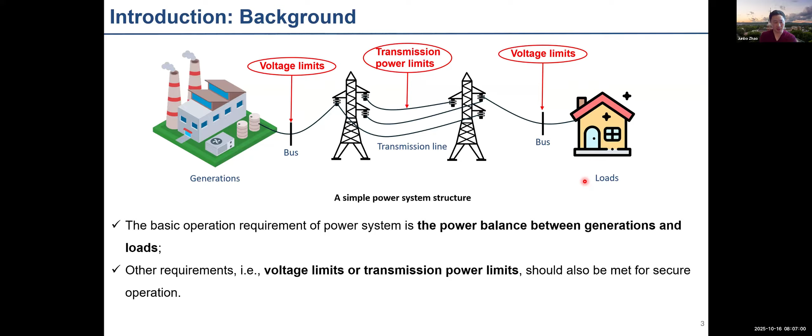To begin with, I think everyone is very familiar with the dynamic paradigm changes. A basic rule is that for power systems, we always want to keep the power balance between generation and loads. But it's very different from the past, where most of the changes are coming from the demand side - we're dispatching the generation to meet the demands. Nowadays, we see both hand sides changing. From the generation side, we have more intermittent generations, while at the demand side, we have EVs, distributed energy resources, and demand response programs. So you will see both generation and demands changing, making it more challenging to balance them all the time. That means you are seeing more and more potential risks - for example, voltage limits violation, power flow violation, or transient stability violation, and so on. That's where we want to focus and develop approaches to handle that.

So wind, solar, although under current situation we may see some slight decline or increase, from the world perspective we're still going to see a significant increase from the wind and solar deployment perspective. And as we know, wind and solar are stochastic, containing some uncertainties that we need to properly handle.

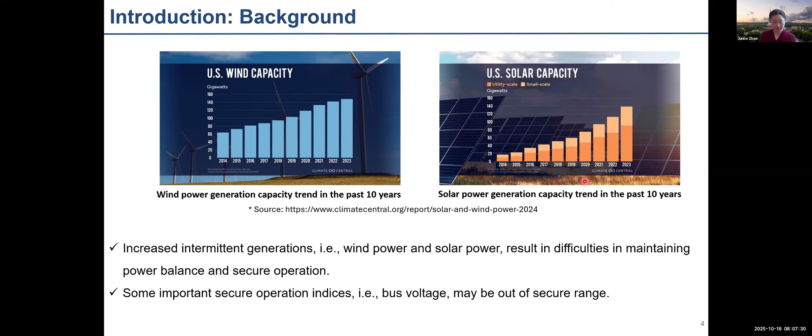To summarize, here is the problem we're trying to address. From the input side, we care about power and generation balance. From a power generation perspective, we see there are renewables and loads, which are subject to certain uncertainties, and those uncertainties may be described by probability distributions. Then we have a network of systems. When those uncertainties are regarded as inputs to the systems, the output is also subject to uncertainties - that's what we are trying to quantify. Either you're looking at the static power flow perspective, where you may assess probability contingency analysis, or if you're interested in transient system stability, that's the stochastic dynamic security assessment. Our main goal is to develop approaches that allow us to quantify how those uncertainties are going to affect the quantity of interest.

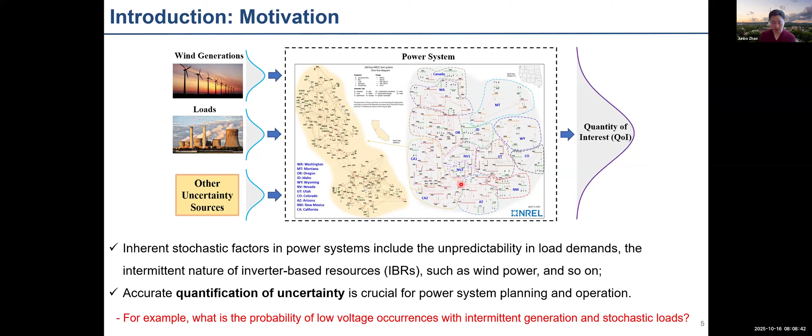The quantity of interest could be any risks that we're interested in, or any of the parameters we do not have confidence in. And that can be fairly treated as two separate problems. The first problem is in terms of uncertainty quantification in power systems from the forward propagation perspective.

This can be explained in a simple example. For the inputs, if you have certain renewable generation or loads, you would like to assess how that uncertainty would affect the power system indexes you are interested in. For example, N-1 power flow contingency analysis: you treat this as inputs, input it into the power flow model, calculate the power flow outputs, and then assess whether there are any voltage violation probabilities or overloading issues across the system. So this is forward uncertainty quantification.

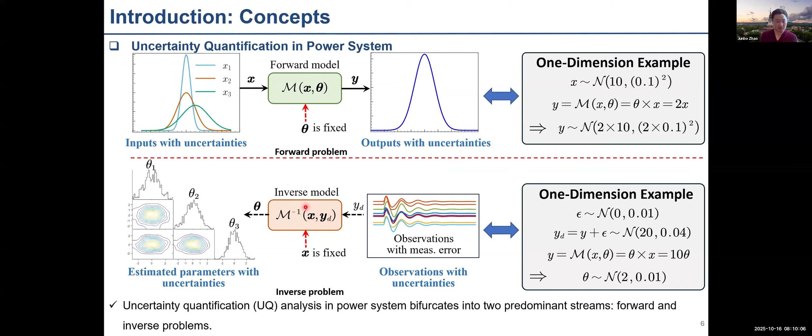The other problem we're looking at is that if you are receiving several measurements, can you use some of them backward to check whether your model is good, or consistent with the measurements? This is the so-called inverse problem: given the measurements and observations with noises, we want to check whether the model is appropriate. If not, can we infer some of the model parameters so that they are consistent? This is the inverse problem we're addressing in this talk.

For the forward or even inverse problems, the most commonly used approach is Monte Carlo based sampling, widely used in uncertainty quantification. You sample the probability distribution, forward those samples to the nonlinear regression models, and quantify the probability distributions for the outputs you are interested in. The challenge for Monte Carlo based approaches is that it can be quite computationally expensive, meaning that if you are dealing with operational problems, it cannot be done timely to meet operational time limits.

So that's where we think about using an approach to accelerate that process through machine learning approaches. We categorize this as a surrogate model—can you use a surrogate model to replace the original power system computational model? Either it's a power flow simulator or a dynamic simulation module. By doing that, you can significantly accelerate the process. That's what we are doing.

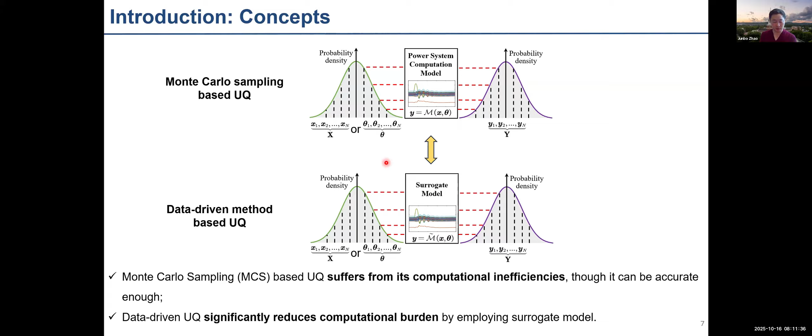Of course, to build this surrogate model, you have to make sure it satisfies all the constraints the system must satisfy, and in the meanwhile it must be representative with quite good accuracy. For that, we have been doing several applications in power systems, from the modeling perspective to planning and operation.

In particular, for forward uncertainty quantification, we look at voltage stability—either N-1 based contingency analysis where you assess voltage stability, or N-k contingencies where you're still interested in how those uncertainties affect system stability. The challenge here is how you're going to handle high dimension inputs as well as topology changes.

Sometimes you may have to handle high dimension outputs—for example, many interest variables you want to monitor. For machine learning models, there are certainly challenges if you output a lot of outputs instead of being particular about a couple of outputs. We will show a little bit more detail later.

From the inverse uncertainty quantification perspective, for example, for the dynamic load model, the WECC dynamic load model has hundreds of parameters, or some inverter-based resource models may have more than 100 parameters. Given a certain set of measurements, can you really select and calibrate those parameters out of those 100? That's certainly a challenge—how you are going to deal with high dimension estimation problems.

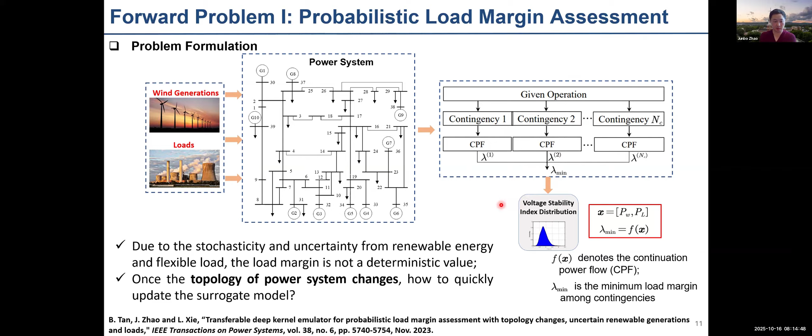If you want to consider those uncertainties, the straightforward way is that you can always sample the probability distributions, get a lot of samples and pass them to the contingency-based continuation power flow, then run multiple Monte Carlo simulations, and you'll get the stability margin distribution. But again, this will be extremely time-consuming, even for small-scale systems.

So here, mathematically, from the load margin calculation, just a recap: we certainly want to maximize the load margin, and the metric we're looking at is that among all the margins we calculated, what is the minimal across the systems under different contingencies, right? So that's the metric we're trying to calculate.

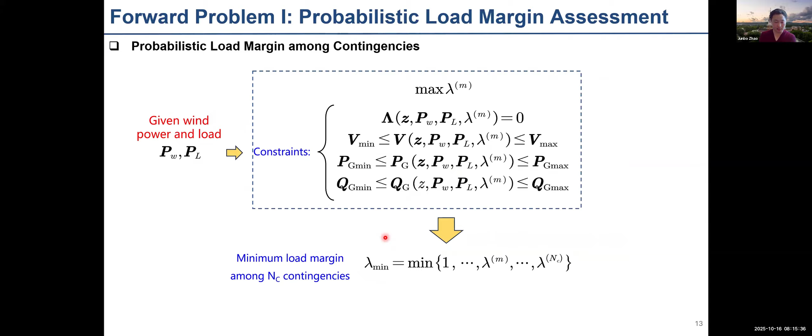Now the problem becomes: given wind power or renewable and load probability distributions, how are you going to propagate through those constraints, and at the end you still get a probability distribution over the margins. It's not going to be a deterministic one. Now it's going to be a probabilistic one. That's where it causes some computational challenges.

So the first approach we develop here is simple, because we know that continuation power flow is very time consuming. Can we develop more computationally efficient approaches where you can really assess the continuation power flow efficiently, right? So essentially, you want to develop a surrogate model to replace the CPF module.

That's it. So here, of course, you need to make sure these approaches have uncertainty quantification capabilities. And one straightforward approach we think about is the so-called Gaussian process, or Gaussian process emulator. This is a widely used machine learning model with natural uncertainty quantification.

But one real challenge for Gaussian process is that it has scalability issues, meaning that you cannot handle large inputs or large outputs. For this particular case, it's fine because we're interested in just one output, which is the stability margin, right? But you have to handle large inputs because there could be large scale systems with hundreds or thousands of uncertain inputs, while the normal Gaussian process cannot handle that.

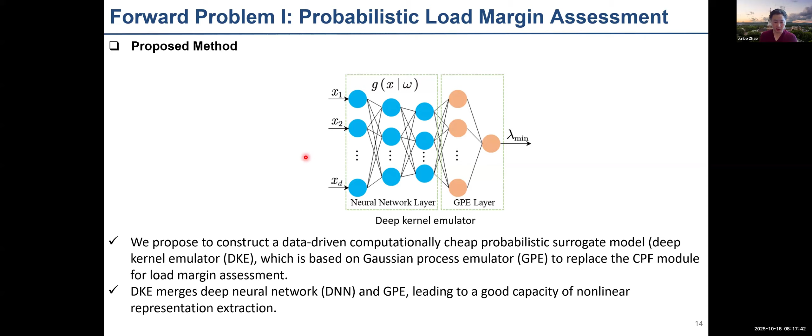To address further some of the topology changes, a standard way is to use transfer learning, and for this case we're addressing n-1, so it will be quite easy because the n-1 contingency or local topology change only affects some local features. So you have to update some local neural network parameters or Gaussian process model parameters, and then you will be able to handle future new n-1 contingencies that you have not seen in the past, or quickly adapt your model to assess this scenario.

We assessed and find that it only needs a few hundred samples or so, and then you will get it updated. It still achieves quite significant improvement in computational efficiency.

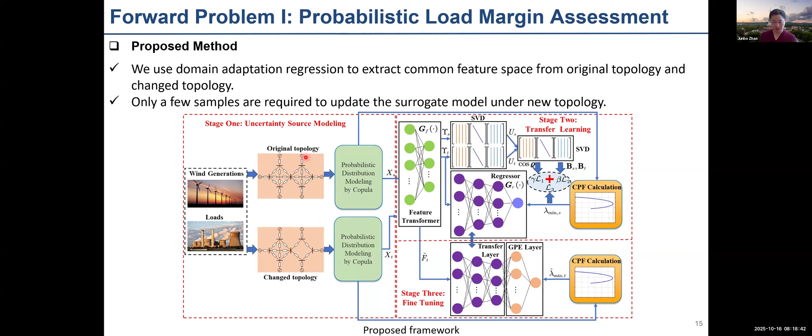So here are the results, showing a very simple system, while in the original paper we showed before, it has a larger scale, over 1,000 bus systems. But the case we want to show here is that if you use Monte Carlo as a benchmark, the red curve is the benchmark, and if you use the transfer, like deep kernel emulator, it does a pretty good job of following the Monte Carlo baseline.

The other way you can do it is that when there's an expected topology change, you can always retrain your model, right? With new data, and everything will be more time consuming, but we find that even with retraining, you don't achieve similar performance as compared to transfer learning. And of course, if you don't do any transfer learning, you get bad results because your model does not have the scalability or adaptivity to address some of the topology changes there. So this is really a key conclusion we want to show.

And of course, from the computation perspective, this can be done within a couple of seconds, or even within a second, while for Monte Carlo, it may take a couple of hours to get it done.

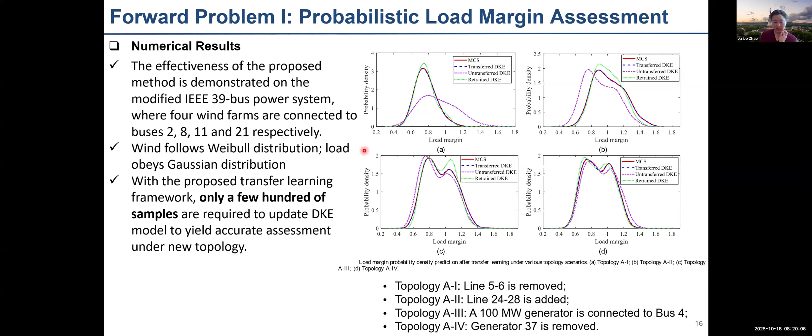So we make sure that from the accuracy perspective, it met similar performance as Monte Carlo while being much more computationally efficient. So this is the first example we want to show for simple topology changes.

Now the other really challenging problem is when you have massive topology changes. For example, for those rare events going above n-2 or n-3, how are you going to handle that?

So again, here's a recap. You may have multiple events, and we categorize them into the n-k events.

And of course you can consider this through Monte Carlo-based sampling approaches, calculate and get the results. But the challenge is you may need over 1 million samples to really capture some of the tail events. The tail is really of interest, and it will indicate the probability of getting some violations. Getting the risk distribution is a little bit challenging.

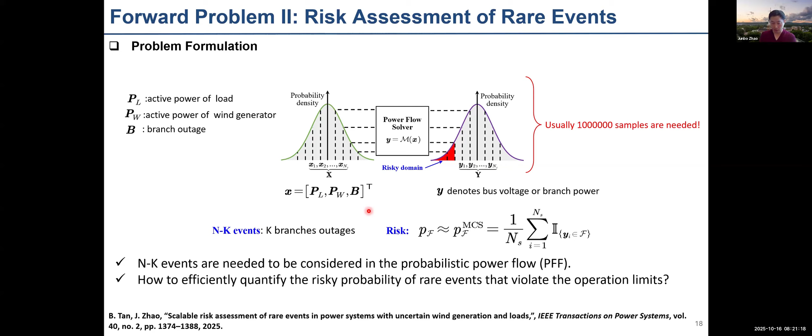That's why even more massive simulation or sampling is needed. And of course, to handle this type of rare events, we have to develop more efficient approaches. What we did here is follow similar approaches developed in the previous slides: we first used a deep DNN to extract the latent features, and from the latent space perspective, we used so-called variational sparse techniques so we can really extract the key elements.

For those key elements, we use k-means based clustering so we can identify some of those risk areas. They share some common features because the system is sparse; some features may share some commonalities. So we want to cluster it, making sure our latent space can represent some different common features while extracting the key n-k contingency phenomena.

With the newly extracted features, we input to the variational Gaussian process, which is even more powerful compared to the Gaussian process itself because it can handle a little bit larger input space. By doing that, we find it does a much better job compared to the previous approaches, which we'll show in comparison results.

And of course, here we use a so-called SVM, support vector machine, first of all, to determine whether for new contingencies or new samples under the trained surrogate model, or those n-k scenarios we have never seen before, you have to run a power flow solver.

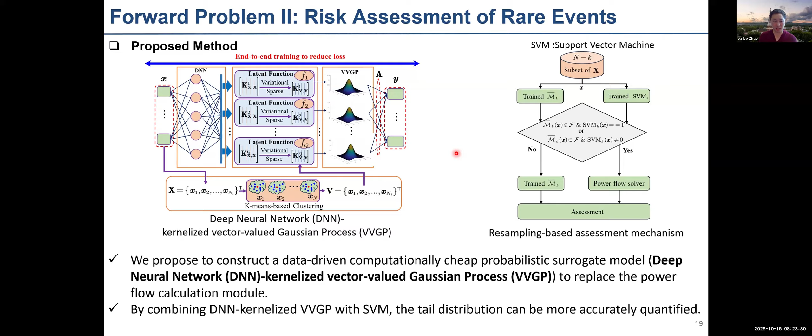So this is what we call our hybrid model. For most cases, you still go through the surrogate model, while for some cases like n-5, n-6, there's no possibility you can train that into your surrogate model. We just use power flow, because those are very, very few cases, and if you only run power flow, it can be done very quickly. That's what we did here.

So from the framework perspective, we first extract the probability distributions and model the correlations using copula-based statistics. For most cases, like 90% of these contingencies, we just get a surrogate model as mentioned before, either through the resampling-based assessment or the SVM to judge at the beginning, to make sure it follows which category of contingencies, and then use that approach through the surrogate model to do the risk assessment.

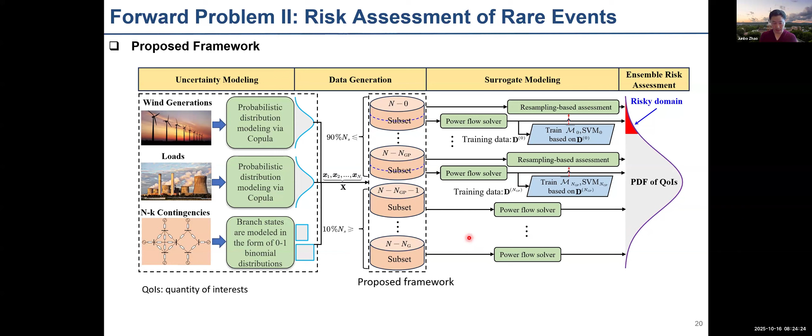While for some of those contingencies that go beyond the normal contingencies we consider, if it happens in reality, you just pass it through the power flow solver, and you will still get the probability distribution on that. So by doing this, it allows you to consider more complicated scenarios.

So we tested this on a modified European 1,354 bus system with 20 wind farms and some uncertain loads. From the computing perspective, the proposed method only requires 1.7 hours to perform the assessment.

While if you use Monte Carlo or our enhanced Monte Carlo approaches, it still consumes a lot of hours to do it. Remember, the total hours here consider all the possible scenarios, which is quite massive. For typical ISO systems, you may have a credible contingency list, and if you provide that, it will significantly reduce the computing power required.

Essentially here, we generate over 1 million n-0 to n-9 events, so that's a massive data set. But even with such a massive data set, we managed to do a pretty good job categorizing the tail events.

For example, if you compare the proposed methods with the Monte Carlo-based samples, they fit quite well with the tail events. For the HMS, I think this is a hybrid multi-surrogate or enhanced Monte Carlo approach that was adopted due to those sampling approaches. For the tail events, it may not be really good at capturing those, so it has certainly some errors in the tail characterization as compared to the machine learning-based approaches we developed here.

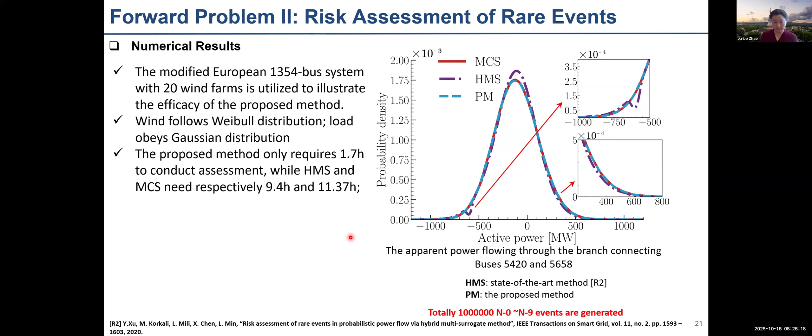So the other problem we are looking at, for the previous two, they are related to the static assessment, right? It's power flow based. But now let's look at the more challenging problems, which is when you are subject to contingencies or a fault, three-phase short circuits, and then whether the system is going to be stable or not.

So the problem is that after the fault is cleared, are you able to right away predict within milliseconds the trajectory of the system dynamic changes? If you can do it, then you still have a couple of seconds probably to do an emergency control. That's what we are having in mind.

So the purpose here is that can you develop a so-called surrogate model to reproduce or replace the time domain transient system stability assessment modules, which will be very time consuming. With PMU measurements or initial conditions supplied by the dynamic state estimator or linear state estimator, you use that as input data to your surrogate model, then you can immediately output the predicted curves, the oscillatory curves, and that will tell you whether the system is stable or not. That's something we're going to do.

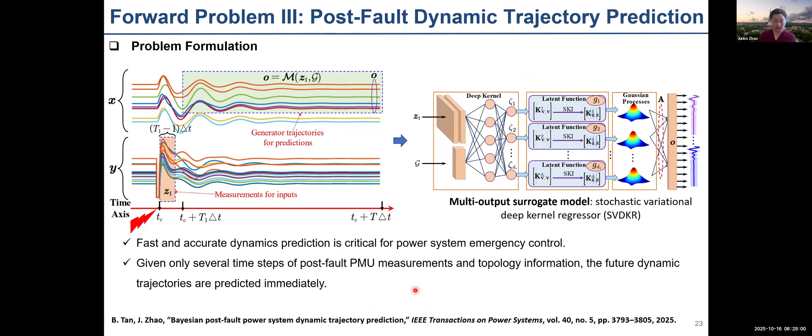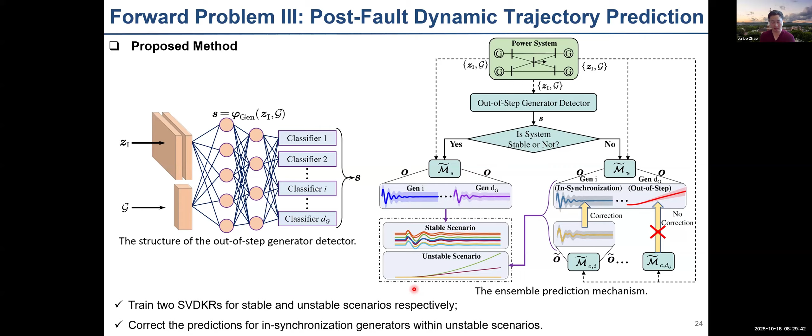But the key role here is that, of course, the unstable and stable scenarios, their curves can be quite different. So we would like to first develop a so-called out-of-step generator detector so that we can clarify whether the current samples belong to potentially unstable or stable scenarios, so that we can build two surrogate models. One is to predict the oscillatory process. The other is to predict how the system is likely to lose stability in terms of the curves, so that they can still give you a little bit of time to act on the emergency control. That's what we're trying to achieve.

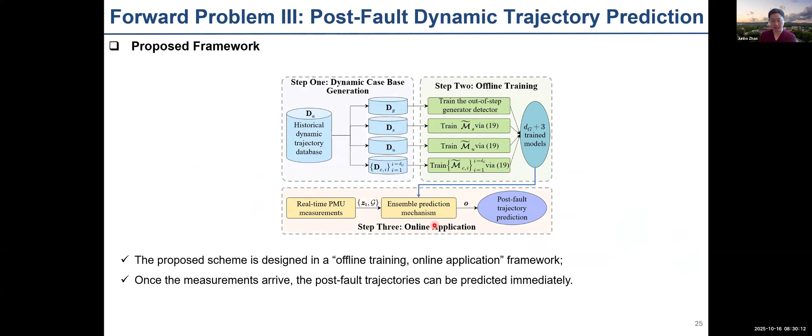So from the training perspective, you are going to generate massive data in terms of the dynamic trajectory database, and you'll consider both stable and unstable scenarios. And when that is done, you use the real-time PMU measurements or PMU-derived dynamic state variables from the dynamic state estimator, input them into the ensemble prediction mechanism, and then we will get the post-fault trajectory predictions.

I will show one result here for the 145 bus power system. On the left-hand side, this is the stable scenario. And of course, remember, for our developed approaches, we always have the so-called uncertainty quantification associated with that, which is a confidence interval. So for our stable scenarios, we pick a couple of rotor angles, ground truth ones, prediction of rotor angle with uncertainty quantification, and rotor speed. We also show the uncertainty quantification. It does a pretty good job if you compare the curves. It's quite similar, and everything looks good.

While on the other hand, you see for the unstable scenarios, we can still do a pretty good job predicting. And one very interesting scenario you will see is that the uncertainty quantification range is going to be really big, bigger and bigger.

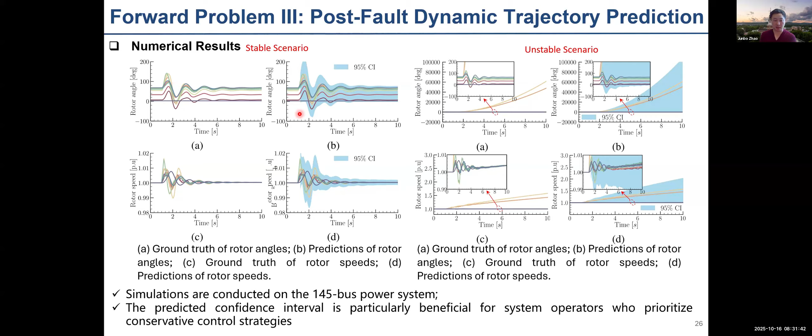That could be another signal indicating the prediction is going to be subject to a lot of uncertainty. It's not really trustworthy since you have a large uncertainty quantification interval. And the other thing I want to point out is that our prediction starts right after the fault is cleared.

I mentioned 3 applications in the forward uncertainty quantification, and we would also be very interested in inverse uncertainty quantification in power systems.

One particular interesting example is dynamic load modeling, and we picked the WECC composite model as the example. It has multiple types of motors with electronic loads, DERs, different types, and static load. If you count the parameters, it is over 100 parameters.

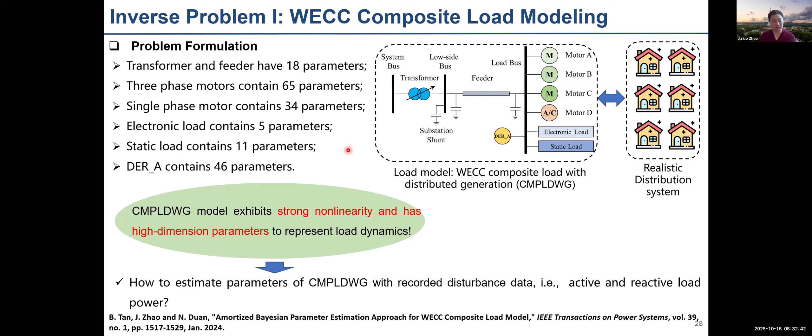So it's really challenging if you are given just a couple sets of measurements, how you are going to determine which parameters can be identifiable, and how you are going to infer those parameters with the limited set of data. And of course, the model itself has strong nonlinearity and high dimension parameters we're trying to address.

From the mathematical model perspective, you can treat this dynamic load model as the function f theta, and y is the measurements from the terminal of those dynamic loads - it could be PMU measurements of real and reactive power, voltage magnitude, and frequency. From the model perspective, you treat voltage and frequency as input to f theta, and the model outputs real and reactive power, which you compare with the measured values.

If there are significant differences, it means our model is not good, and we have to calibrate it. That's where it triggers the parameter inference.

There could be a question - since there are over 100 parameters, which set of parameters are in charge of the discrepancy? So you have to do a sensitivity analysis. But this isn't like traditional sensitivity analysis, like linearization or trajectory-based sensitivity. We want a global overview of which parameter contributes to which percentage of the model discrepancy.

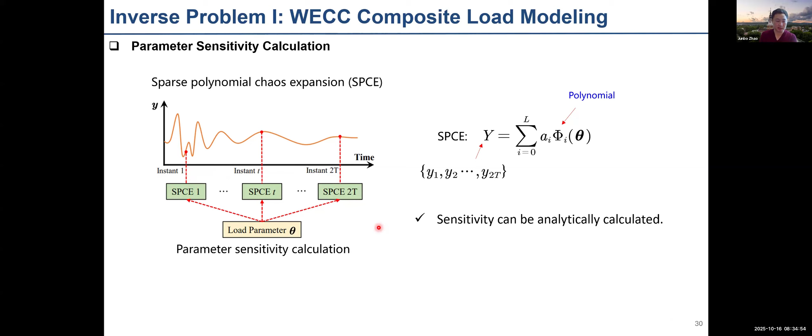So in that way, you can have multiple stages of calibration based on the active participation of those parameters. That gives you the power to handle the large dimension.

From the proposed method perspective, we use the conditional masked autoregressive flow, so instead of just inferring the values of the parameters, we automatically get a probability distribution associated with that. This matters because we want to know the intervals for parameter changes and the uncertainties associated with parameter estimation.

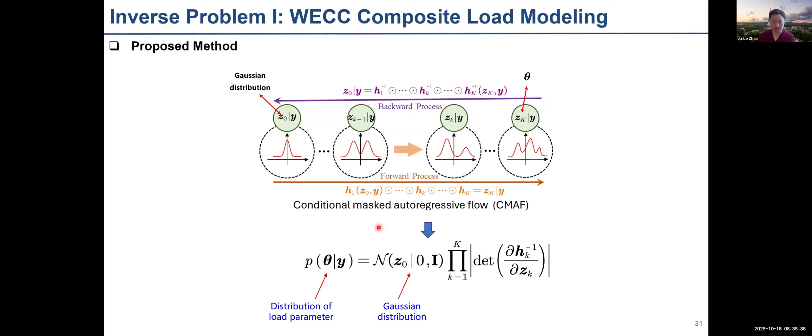So I mean that we did a pretty good job for covering that, and we also tested multiple different distributions of the parameters, different deviations from the true values and so on.

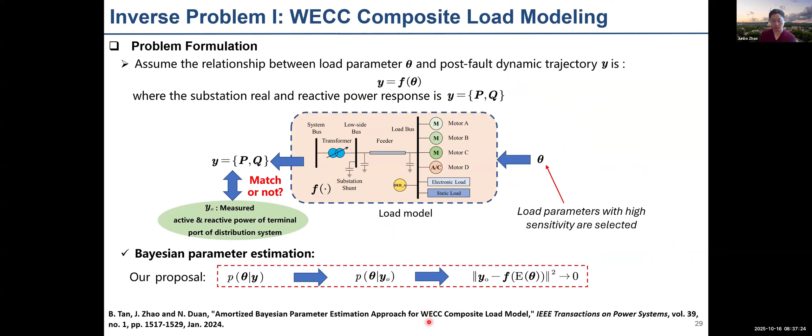So for more details, feel free to look at the papers we mentioned before. I think probably here, this is the paper you can check where you'll see multiple testing scenarios, the mathematical derivation behind. And of course, for this work, we really didn't consider the measurement error.

And of course, we know for PMU measurements, it is always subject to measurement noise. Sometimes it may be noisy, and sometimes it may be good. But anyway, we really need to consider the measurement noises. I don't think many of those existing machine learning approaches developed are specially tailored to handle the measurement noise, and we did find that the measurement noise is affecting the estimation performances. Sometimes it may cause divergences.

So to deal with that, we want to develop a surrogate model to accelerate the inferences. And on the other hand, instead of using the Monte Carlo based approaches to infer the parameters, or the traditional Bayesian-based approaches, we developed a derivative-based Monte Carlo sampling approach that allows better sampling of the parameter space and helps us identify the right set of parameters that are of interest to us.

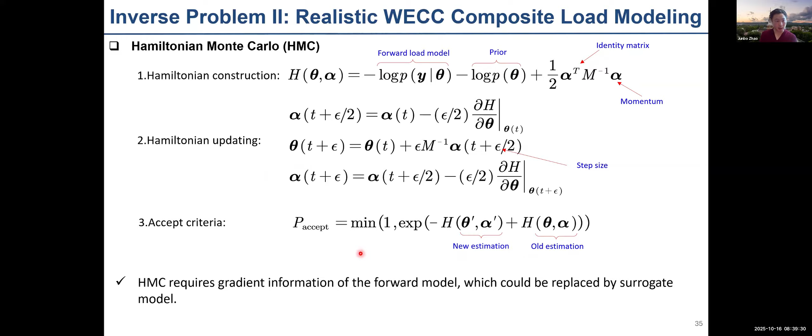So here, this is the main concept related to the Hamiltonian Monte Carlo approach. It has different steps, including construction, like forward load models, the prior distribution. You have to assume a prior distribution associated with the parameters. And then you have to do the updating of the parameters. You have to decide the step size, and then you accept whether the parameters you identified are a good set, and then you update based on the old estimation results. So this is the main steps behind the HMC method.

And here shows the overall framework of the developed approach. First of all, we developed surrogate models. We conduct the sparse Gaussian, sparse polynomial expansion-based approach to identify and rank the sensitivity across different measurement sets. And this is the global contribution of the parameter set.

And then from step 2, we use those generated samples to train a surrogate model. And from here, we do the posterior distribution estimation according to the Hamiltonian Monte Carlo approach to further infer the parameters associated with the model, and also the probability distribution associated with that.

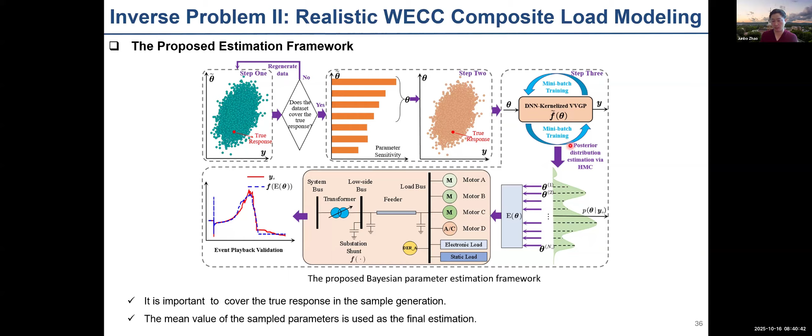And here the estimation is more like a sampled parameter, because this is the posterior inference. So we will use the sampled mean of the sampled parameters as the final estimation. Of course, since you have multiple samples, you can have a probability distribution associated with that.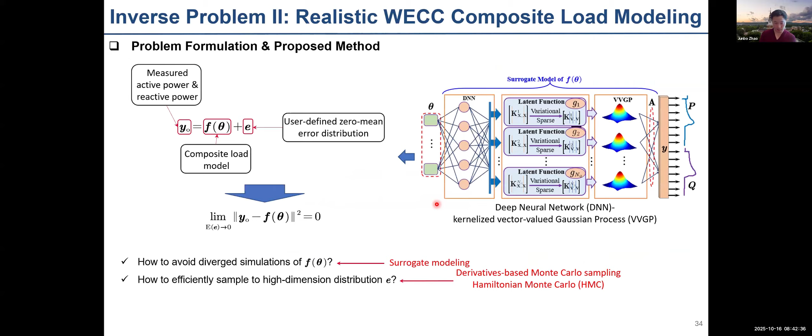We also tested on some of the synthetic data sets, and we will show significant differences, which you can find in the paper here. I think later I will show in the references, you'll find more details in the paper in the reference list.

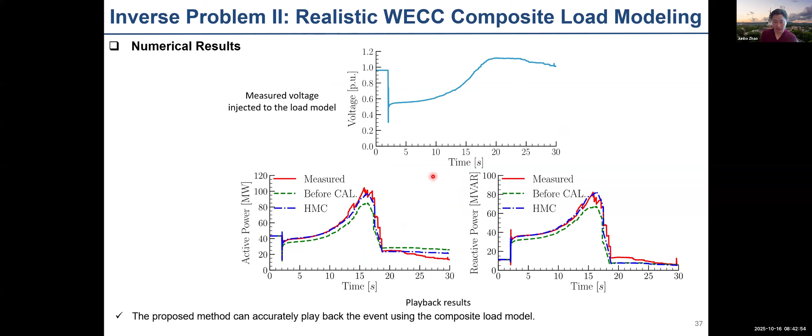Lastly, if you do our estimation under synthetic parameters, because under such a scenario, you know the true value. For the previous case here, since this is a field measurement, you don't know the true value, you can only compare before and after calibration. The similar conclusion: even when subject to noises, different levels, different deviations from the true values, we can still capture quite well with the developed methods in terms of the parameters.

And this shows nicely the histograms, and it shows the red curves capturing the true value. The dashed vertical lines represent the true value of the parameter set.

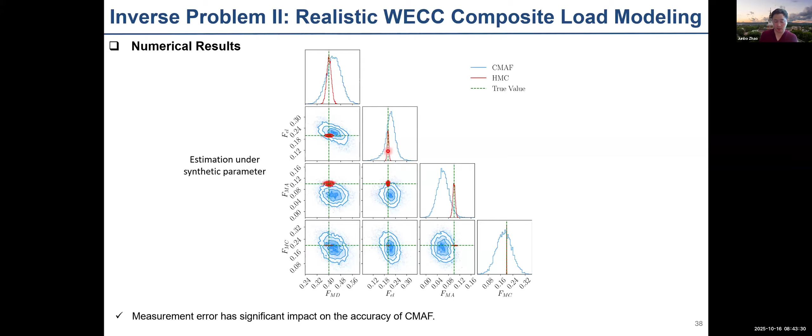So in conclusion, we show that the surrogate model can help significantly reduce the computational burden in terms of security analysis, either contingency analysis or stochastic dynamic security assessment. On the other hand, by using the surrogate model, you can do pretty good inference of the parameters, which can help improve the power system model and assess the power system operation.

We are working on a more difficult job in terms of time-varying composite load modeling. This is even more challenging because you have to identify the time-varying visibility or identifiability of those parameters, and then you need to calibrate from time to time. This is more challenging. Also, for probabilistic contingency analysis, we haven't tested a system with over 10,000 bus systems, which requires additional scalability.

So we're currently working on further enhancing the scalability to handle large scale systems, at the similar size as ISO systems. For example, we have some system sizes like ISO New England. We would like to see how that can work for 20K plus large systems, and whether some machine learning approaches could still work for carrying out different tasks.

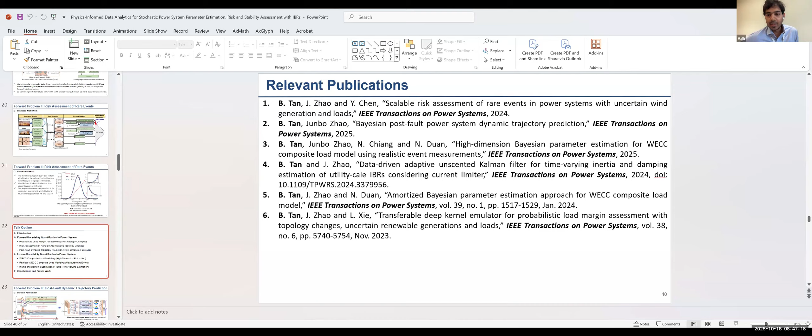So Dr. Zhao, while we wait for questions, there's one question in the chat from Sungjo about your post-fault dynamic trajectory prediction section. My understanding is that the proposed method is able to predict the entire trajectory in one shot, given initial measurements at 2 time steps. What feature of the framework allows this one-shot prediction that bypasses the commonly used rolling prediction framework?

I want to emphasize the motivation for doing one-shot based prediction. Our application is really focusing on emergency control. Emergency control means that you do not have much time to act—you have to act right away, because the system can become unstable within 1 second or less.

So after the fault is cleared, you can use the PMU measurement at that exact time instance as input to your model, and within milliseconds, you come up with a curve for the next 2-3 seconds or 5 seconds. You see the predicted curve shows you're going to have stability issues, so you have to act right away instead of using rolling prediction. With rolling prediction, you don't have time to act. So here we're really focusing on emergency control, where time is really, really limited and you have to act very quickly.

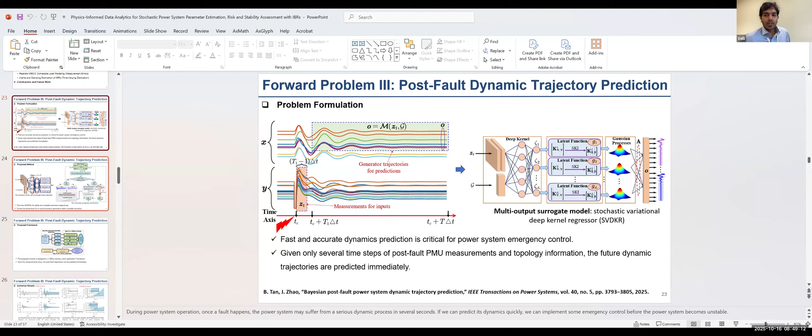I'll move to the next question. This is from Syed: for the load modeling work you are doing, are you also accounting for temperature or embedded climate models in any way? Do you mean whether we consider any climate models for weather information, weather data?

No, not really, because this is a dynamic load model, not a static model. You don't have to consider weather parameter changes, but I think one thing of interest could be that due to weather changes, it could be relevant to the real-time or time horizon calibration of the WECC models. Because you do have DER included in the model, and if the weather changes, some of those DERs may be affected in percentage. For each model here, you have a certain percentage associated with that, so the percentage associated with that DER will be affected. That's part of the time horizon identification we can do. But normally a WECC model depends a lot on disturbances, and does not emphasize climate impacts yet.

Gotcha, that makes sense. So this one is from SD: why have you named this model surrogate? Surrogate means you want to find a model that can do a similar job as your original model, right?